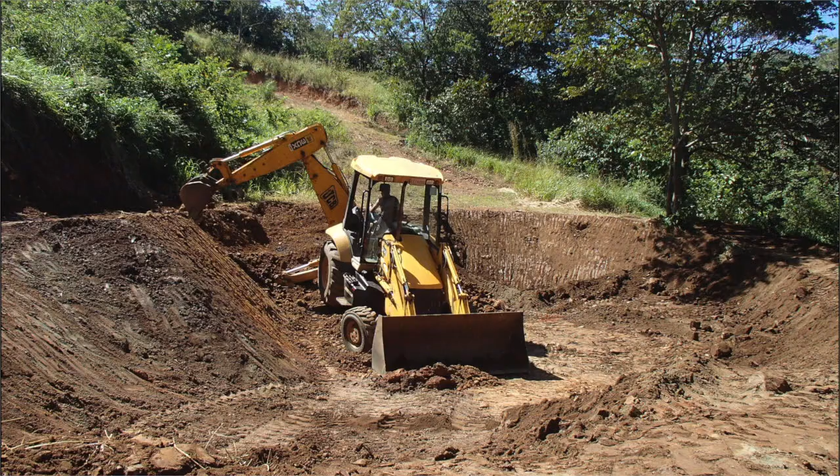So you start by choosing the proper location. You need to have access to flowing water. We are lucky to have a full inch of water flowing in constantly from a nearby stream. Standing next to me is Jose, a very skillful and dedicated backhoe operator. He was a critical part of our success.

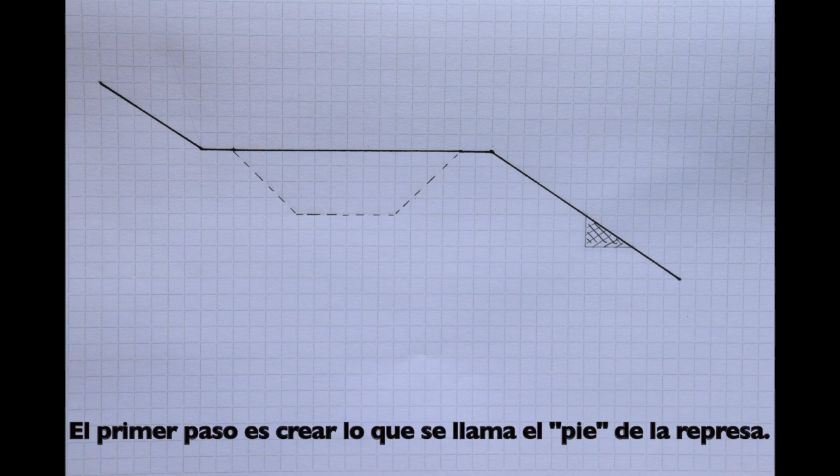The first step is to set what's called the foot of the dam. It's the first terrace to start building the dam bottom up, and it needs to be well below the deepest part of the future pond. Once this first terrace is done, the backhoe can maneuver along the edge of the dam. The idea is to take material from the upper part of the slope and deposit it on the terrace, compacting it firmly by driving the backhoe back and forth over it.

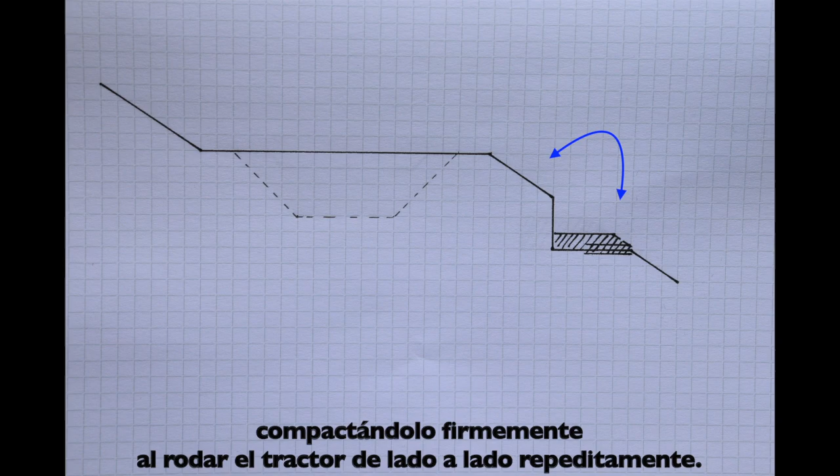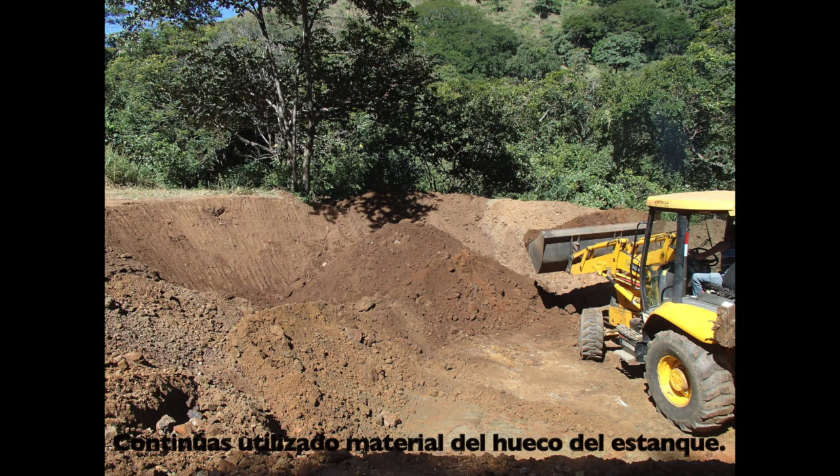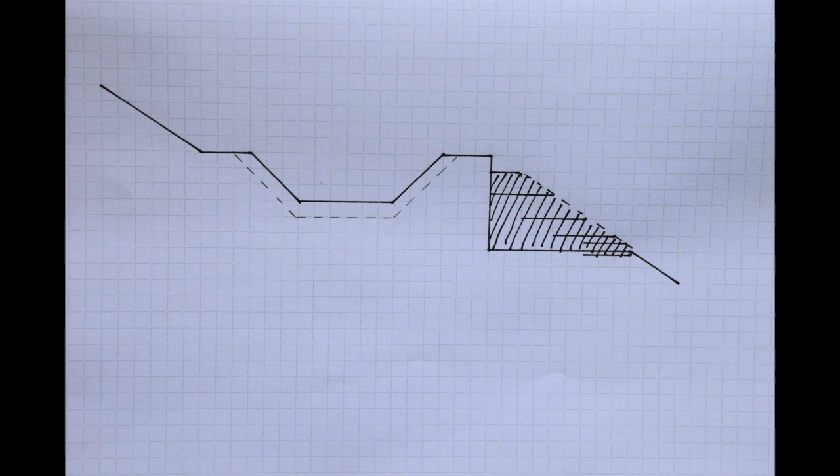As you keep taking more material, you work your way up the slope. Making thin layers is key to make a compact foundation. You continue using material from the hole of the pond itself. Since you're compressing the soil, you need more material than you initially think. It's really critical to add thin layers on very level terraces. Jose even loaded the front blade of the backhoe to add extra weight and compress the soil even more. Add water if the soil is too dry.

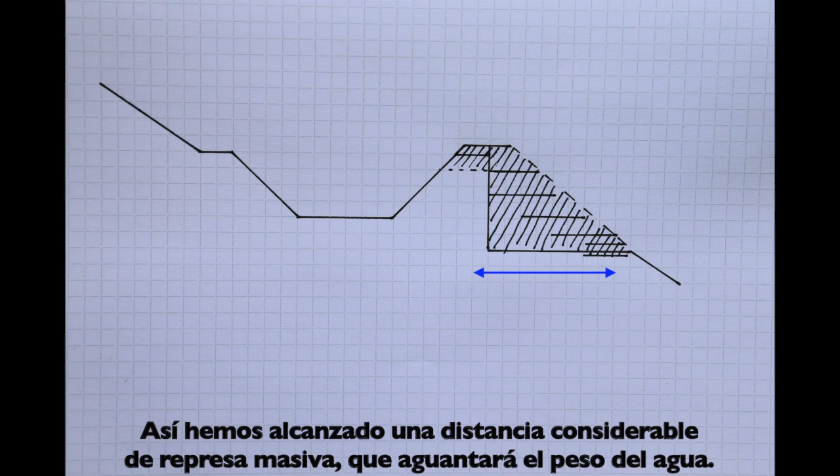You need to make sure the dam circles around the complete lower perimeter of the pond, where the weight of the water would tend to flow downwards. So now you have achieved a considerable length of massive dam, which will support the weight of the water. We wanted a deep pond that can support tilapia, so our pond is about 4 meters deep. Make sure you leave at least 40 centimeters of clearance on top of the dam to prevent any flow of water over it.

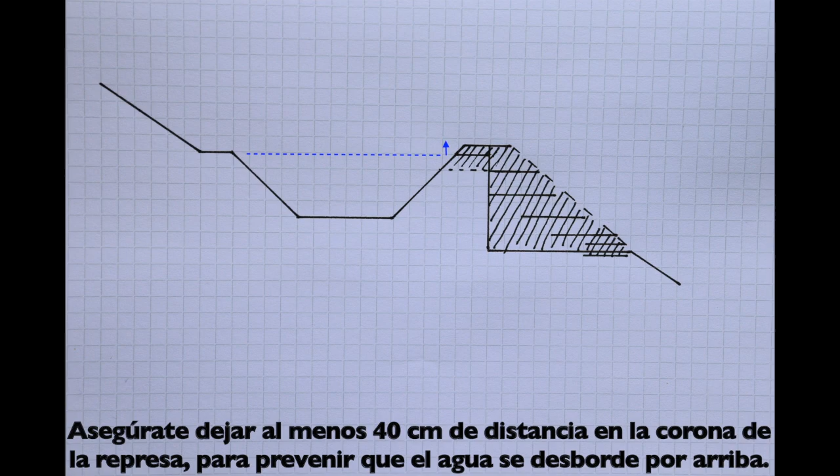The next step is to build an emergency drainage canal where water can flow out fast in case of flooding. The canal opening must be at least half a meter below the lowest point of the dam. And it must guide the water away and around the dam without getting anywhere near it to prevent erosion. Finally, secure the slope of the dam with tight rows of vetiver.

The water level receded too much in the dry season. We had to add a lot of local clay and stir the water often for the particles to settle down and clog all the cracks. Sometimes it takes days for the yellowish water to become clear again.

The pond has had a very positive impact on the ecosystem. Since we didn't use concrete or plastic, the life in the pond is thriving with small fish, frogs, and insects of all colors and shapes. It has also become an oasis for all kinds of wildlife. But not only the ecology benefits. I love to see life thriving in and around the pond, but I also love to sit and rest in this beautiful spot and feel totally at peace.